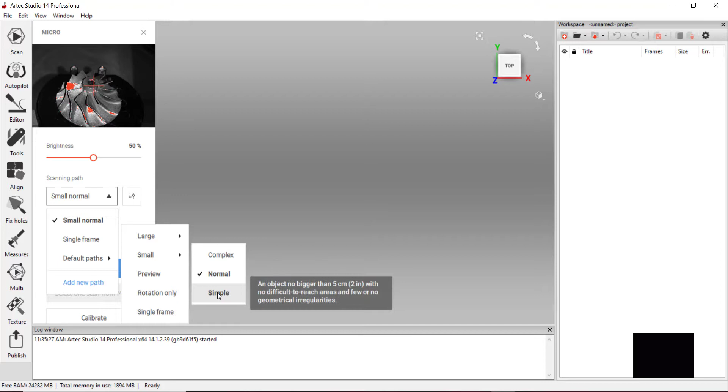Small objects like this, again, complex, normal, or simple. The complex path selection will actually provide us more scanning area, so it does take a little longer. And then we also have our normal, which is basic, and then simple. So if you're just doing something that maybe has less undercuts in this part, you might go simple.

Let's go ahead and set this up on normal. And then we can set this up if we wanted to do something with high resolution, also if we wanted to capture some color. So let's go ahead and do some high resolution scans on this.

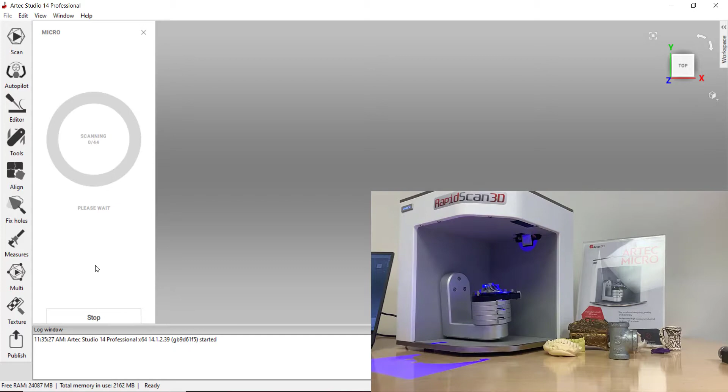So what the scanner does is it actually projects a pattern onto the surface, and based off of the distortion of the pattern, the cameras will use that to take pictures and align each scan to each other. The scanner has a 2-axis turntable, so the whole scanning process is really automated, which is really nice.

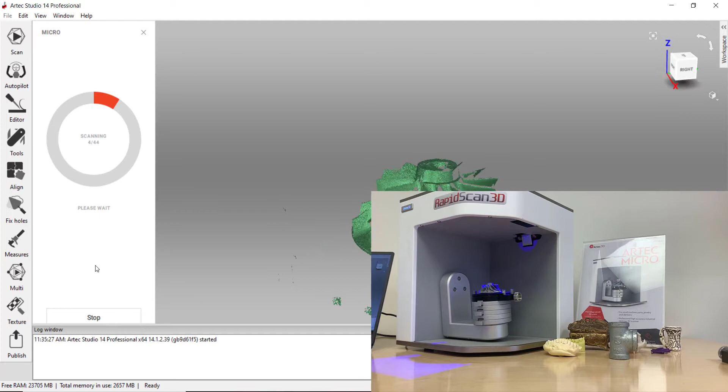So with the normal setting, the scanner will capture 44 frames here, and it'll give us a progress bar while we're going through everything.

The stated accuracy of the scanner is going to be plus or minus 10 micron, and stated resolution is going to be 30 micron. So accuracy 10 micron, 0.01 millimeter, and resolution 0.03 millimeter.

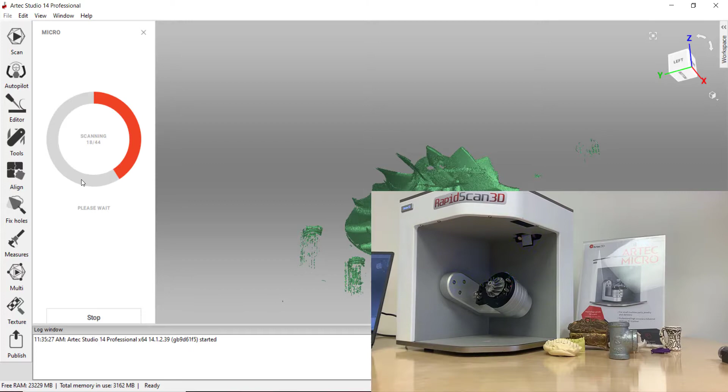We get asked a lot, well, what's the difference between accuracy and resolution? Accuracy is repeatability. When we state the 10 micron accuracy, this is a repeatability for us. Typically we go through a process where one person scans the part a certain amount of times, and then we pass that along to a few other people.

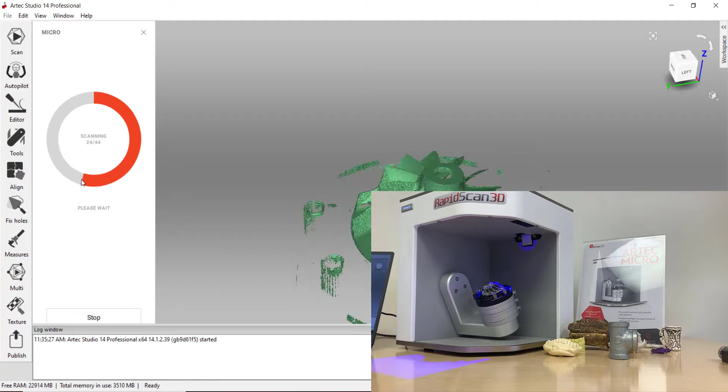It could be 3, 5 other scan technicians, and then we take the data from each of those scans from each of the scan technicians, and then we do an inspection, or an average of accuracy between those scans, and that will provide us what the stated accuracy typically is from the manufacturer.

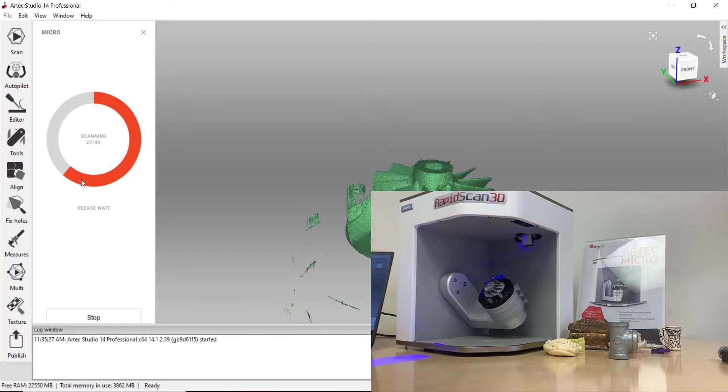The resolution is actually the point spacing. So when we're scanning this, the resolution at 30 micron or 0.03 millimeters means that within 0.03 millimeters, we're going to have a point, point to point. So there could be a little bit more, but typically that averages out at 0.03 millimeter resolution.

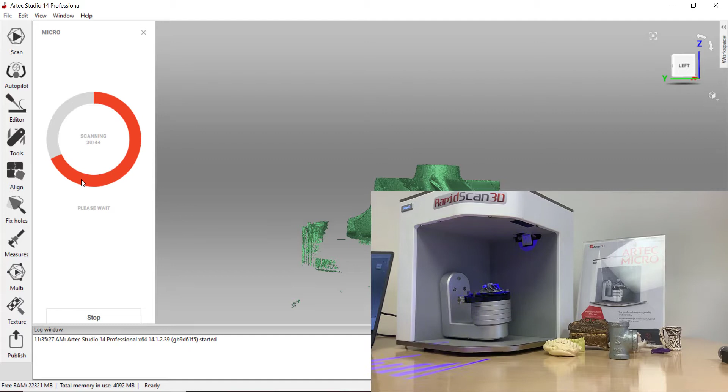Each one of those points has an X, Y, Z coordinate system, so it knows where it is in space. And that's how we have the ability to create the mesh and connect those points by triangles, because of the point spacing and the X, Y, Z coordinate systems.

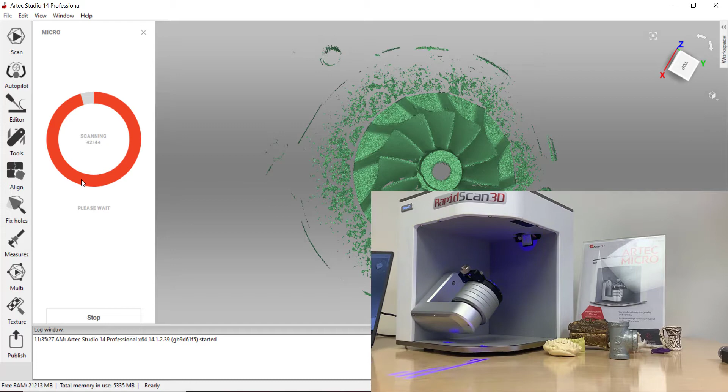All right, so for our first scan that we have here, we took 44 pictures or frames, and this is just the point cloud from the data.

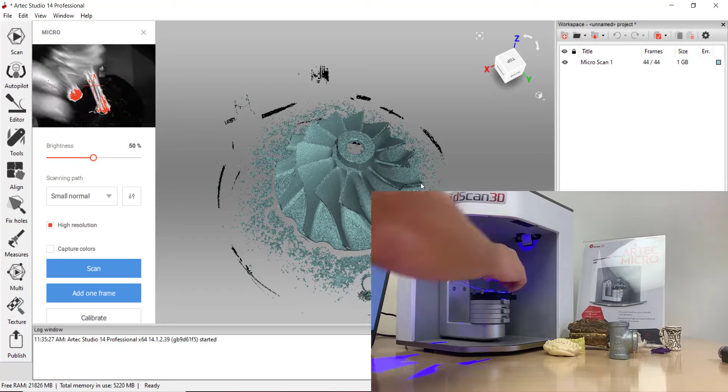Of course, we haven't scanned the bottom, so let's go ahead and pull this off. To attach this, I just used some putty, or museum putty, and attached it to the bottom. You'll notice here that there's some female screw fixtures. The system comes with some fixtures we can use to mount the part if it's a little bit heavier. This valve might be a little heavy for the putty to hold, but for this part, it's pretty light, so we can just use this putty.

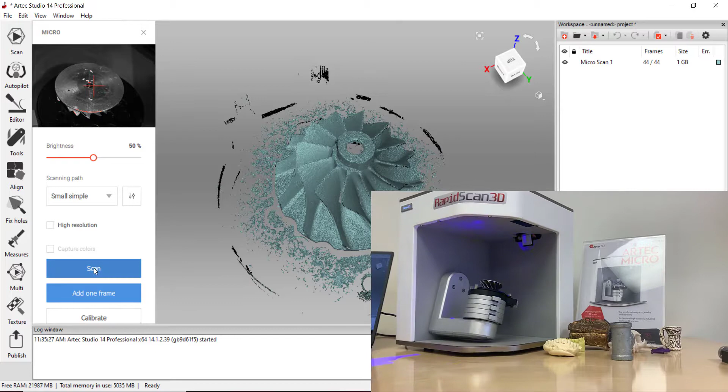I'm gonna go here, and let's go ahead and scan this again. This time, I'm just gonna do a small, simple scan. We're just trying to capture that bottom area. We don't need the high resolution because we're trying to capture this, and we'll go ahead and scan on it. What you'll notice here, last time when we scanned, it gave us 44 frames. So here we're actually only going to do 28 frames.

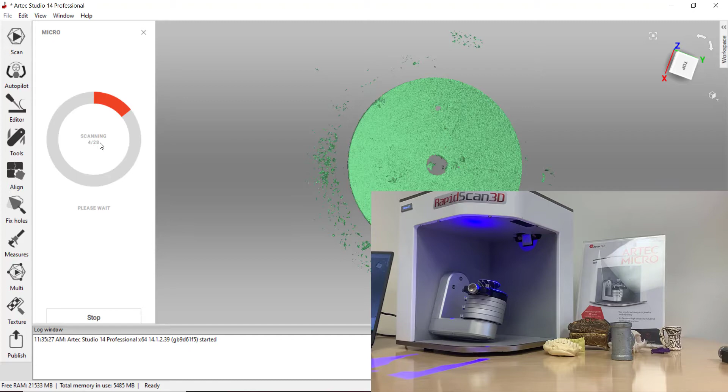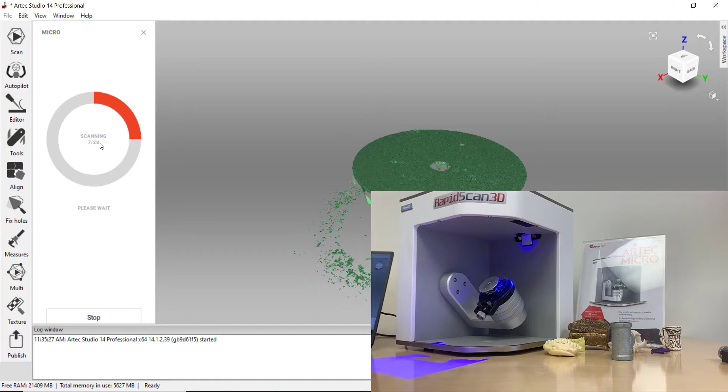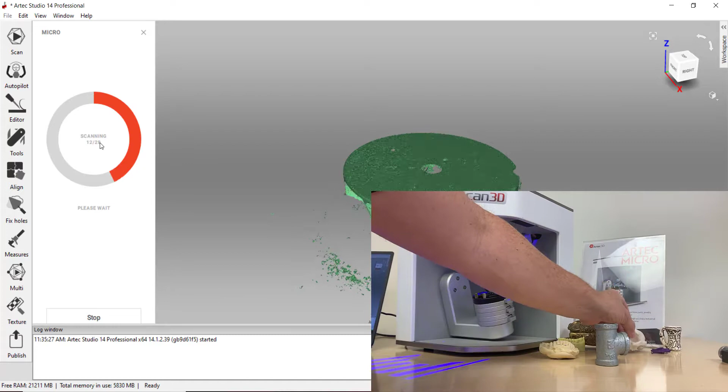What you'll also notice is that this scanner is a desktop system, really easy to move if you need to - you just need to put it right next to your computer. It's great for scanning, it's designed for scanning smaller parts. So you see here we have this valve. We do a lot of stuff with dental implants, small 3D printed parts - I think this is like a rat skull - things like that. That's kind of the ideal space or part size for scanning these objects.

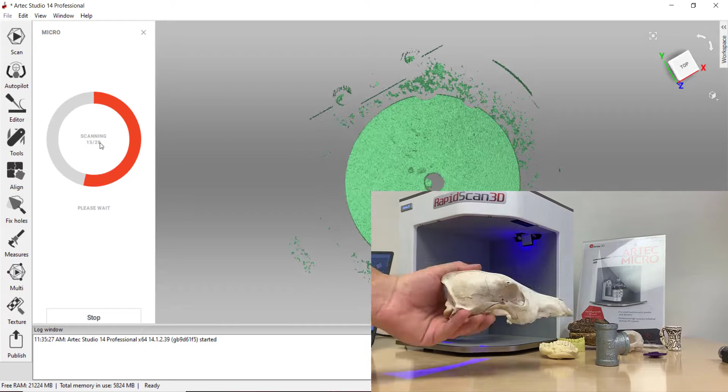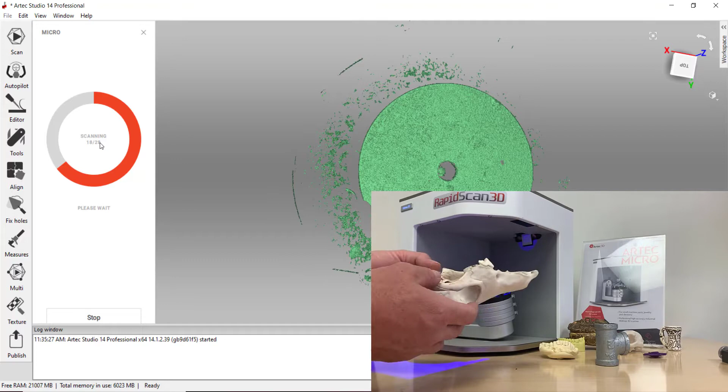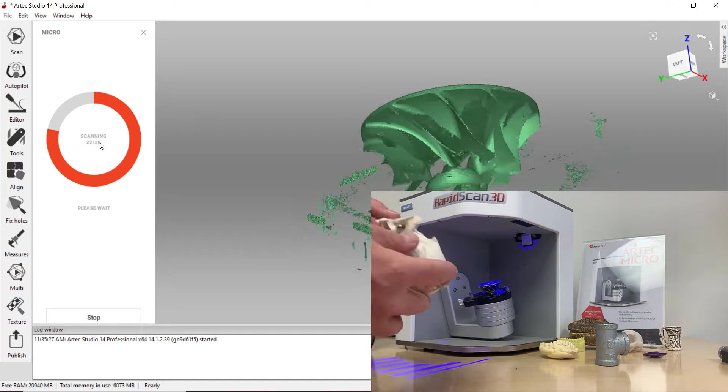Now, if you're trying to scan something larger - we have a lot of clients looking to scan skulls or bones for archaeology, anthropology type stuff - this might not be the ideal size for the object. We still can do it. If you wanted to get some small, high detail within an area, we can set this in and scan it. Remember, we can also create paths so we can scan from one side just to get some high detail, and then maybe take some Space Spider data, scan the part, and combine those. So maybe we'll do another webinar on how to combine the data from the Artec Micro and the Space Spider for parts like this.

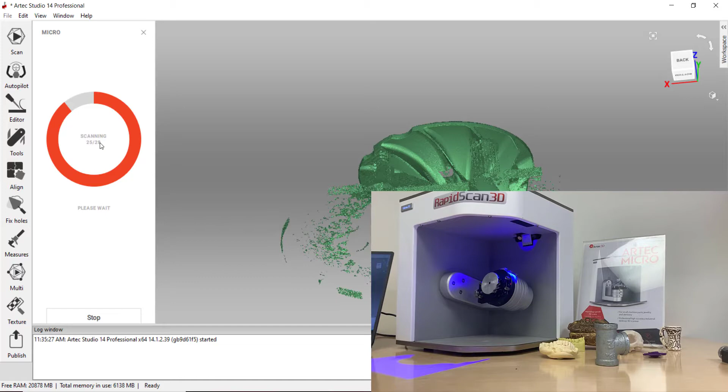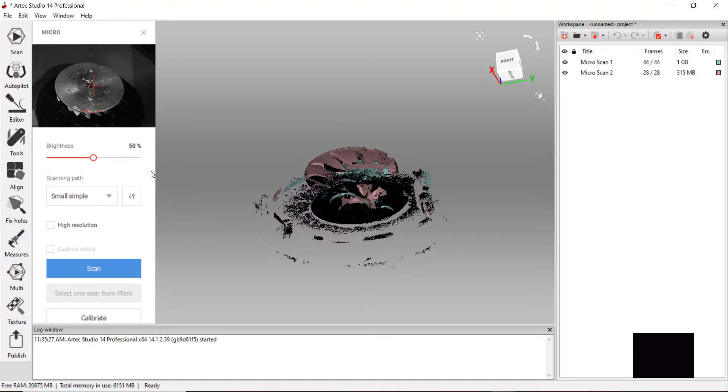All right, so we're just coming up and looks like we're all finished. So now we have 2 scans here. You'll notice that they both have different frame amounts, and they're not aligned. So we have our scan 1 here, which is our blue one, and we can identify that as here. And if we switch them around, we have this more pink color for the bottom. So let's go ahead and click out of here.

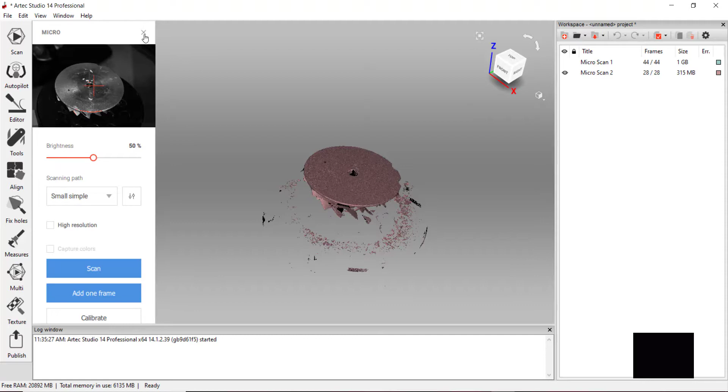The first thing we're going to do here is delete some of this table area that we don't need, so let's just clear some of that out. I'm going to go into my editing tool, the eraser tool. With the eraser tool, we have a lot of functionality here. We have a 2D eraser that we can kind of erase through - this is a nice tool.

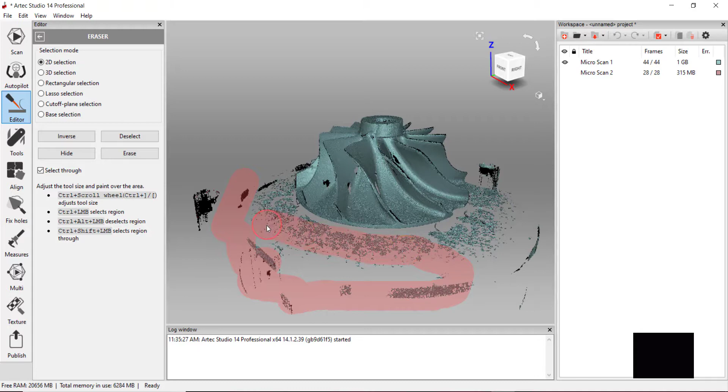We also have one of my favorite ones, which is the lasso - oh sorry, that's the rectangle one. So with the rectangle, we can just delete out of here. We also have a lasso tool, we can just lasso around areas and delete.

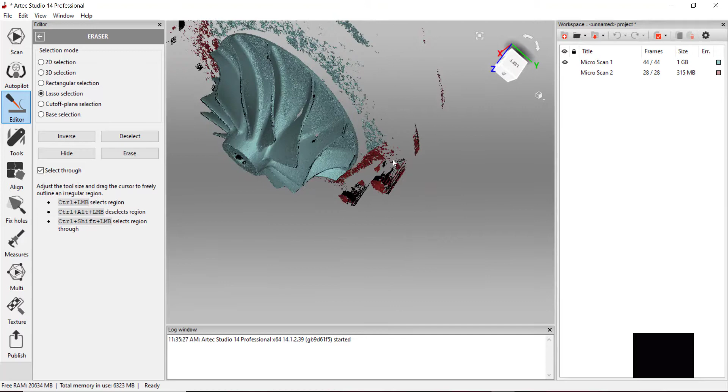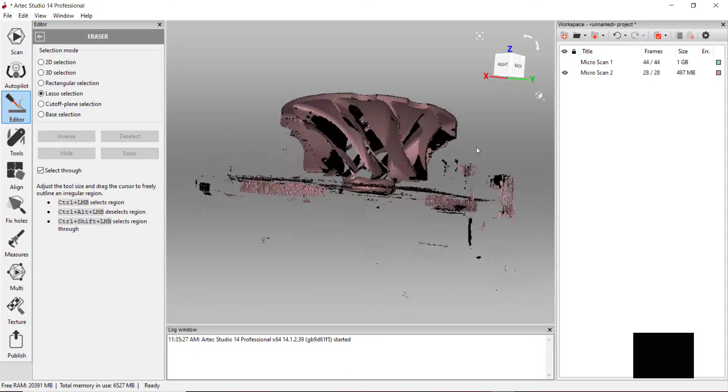And let's go ahead and delete all this out of here, erase it. And let's just double check on that other one, see how much we have. All right, same as here, we'll just go ahead and do this - for this part, I'm just going to use that rectangle and delete it. It's okay that we're deleting some of this data. We have it on the bottom side, so most of this we're just using as reference for when we can align these scans.

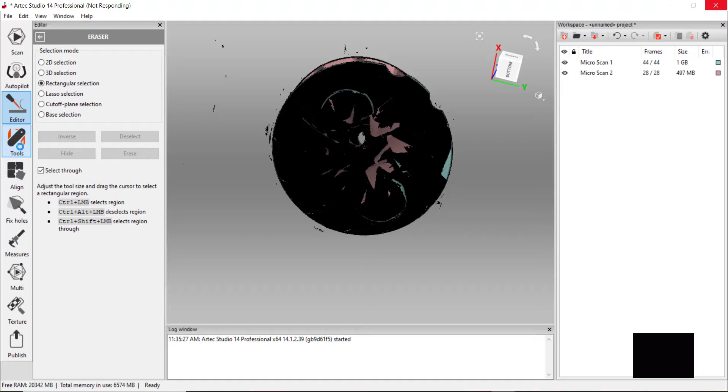Once we're done with deleting out of this, what I want to do is actually do a registration. What the registration does is it's going to do a best fit for each of the scans. And of course, in a webinar, things happen, so this is a little delayed, but no problem.

Let me go ahead and show both scans here. The software actually does a fine registration on each individual scan from the Micro, so it's grayed out. We don't have to do that. So the next thing we'll do is we'll just go ahead and align these scans.

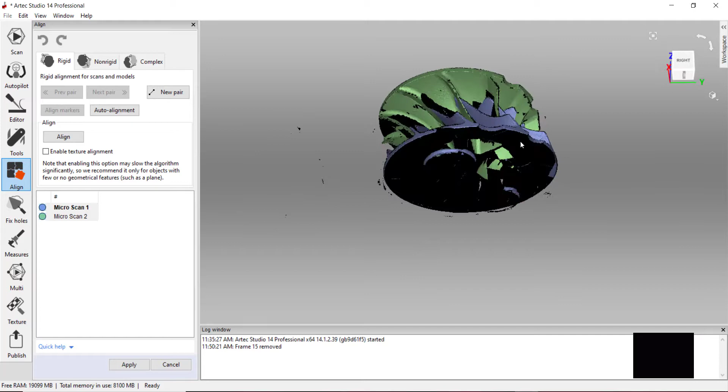We do have an auto align tool, which is really nice. It just automatically aligns the scans for us. I'm just going to go ahead and show you another tool. It's called pinpoint alignment.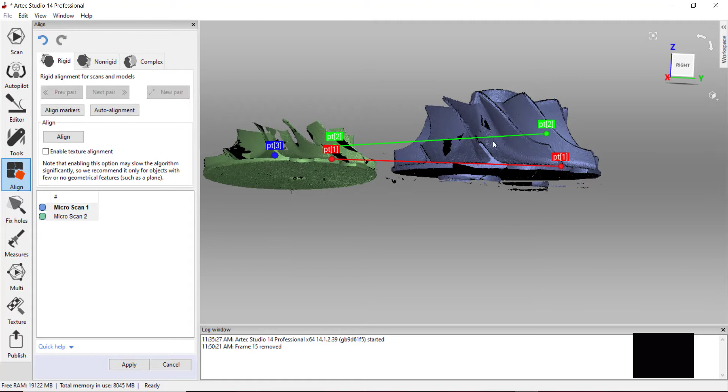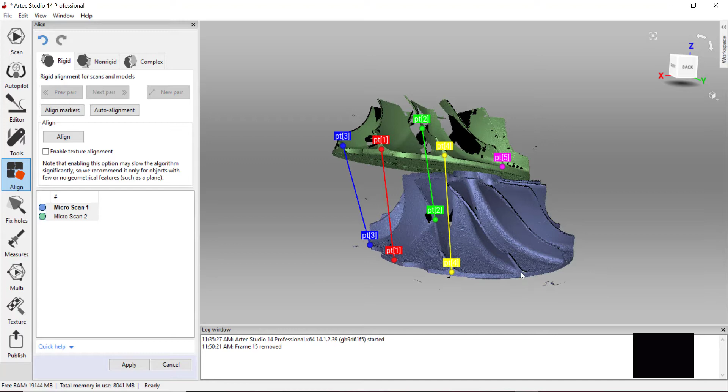What we're doing here is just taking a couple common points on each part of the scan, helping the software do a quick alignment. I know there's a spot right here for each of them, and maybe one more. Typically you need about 2 or 3. We maybe don't need as many as here. I'm just going to align that in.

So it got to where these points were close to where I put them, but as you can see, the data is not aligned, and that's no problem. This is just for getting it into a general area, and then we're going to click Align, which allows the software now to use the common geometry that we have to do the alignment.

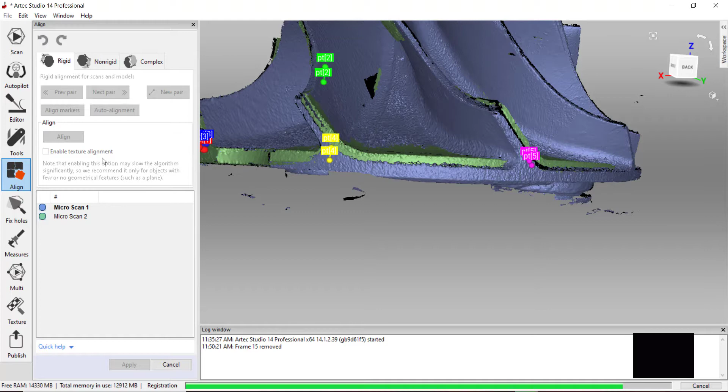We also have an ability to use texture alignment, so using color. If you are scanning something that has a lot of color, we can actually utilize that tool to do the alignment. All right, so it looks nice and aligned.

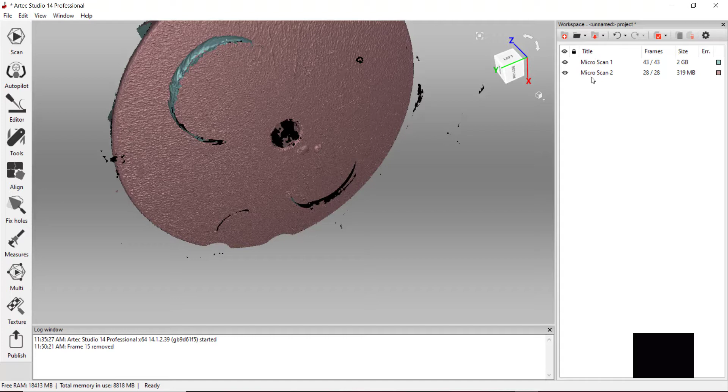I did notice that there's some data here left over that I didn't clear out. So let's just go ahead and hit apply, and I can see it's coming from the blue selection. So let me just go ahead and clear that out first.

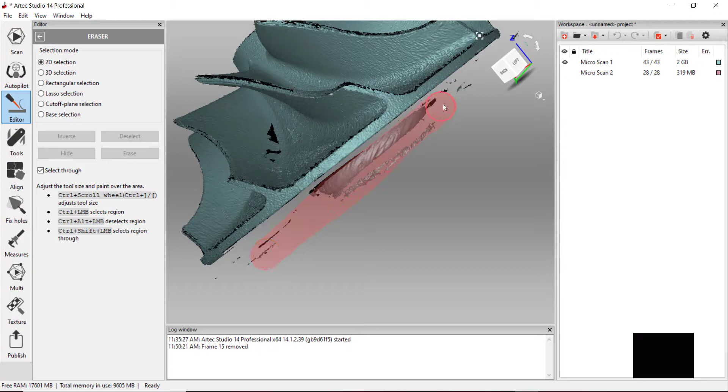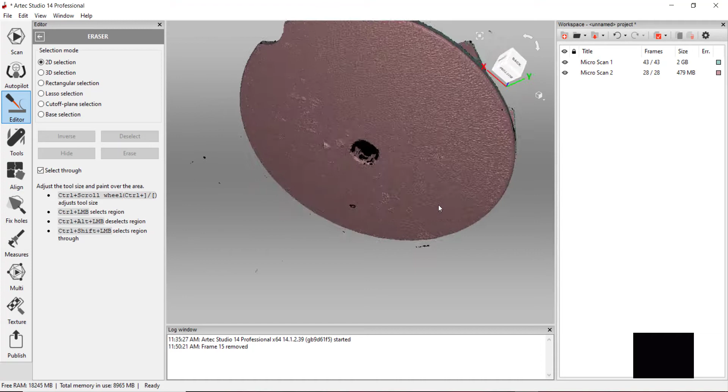A little more right in here. And erase. All right, so now we have both scans here. We did the alignment process. So I'm just going to click out of here.

Once we're done here, now that we have these both aligned, what I want to do is go ahead and do a global registration. So I'm going to go into my tools section, after I click out of there, and I'm going to do a global registration.

Just going to use the geometry because we have no texture. But if we did apply the texture when we're scanning, we'd have an option for texture here, and I'm going to hit apply. What global registration does is it looks at these individual scans and does a best fit between the two.

So automatically when we're scanning, the software will do a rough registration, which you'll see on top under the registration - that's aligning all the scans together. And then once we're done, the software automatically did the fine registration.

We can use that later in a different scanner. Artec has the Micro. They also have the EVA, Space Spider, Leo, and Ray. So we do have the ability to use that fine registration in that software as well.

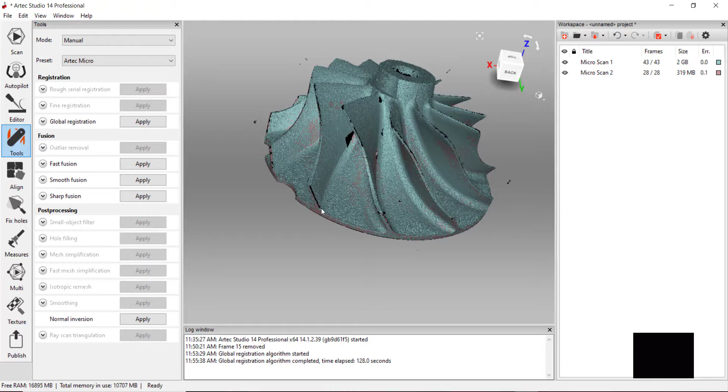All right, so we went ahead and did the global registration. Everything looks really good on this side. And now I'm just going to go ahead and do our Sharp Fusion.

So I'm going to go ahead and do a drop-down menu on the Sharp Fusion. Under Sharp Fusion, basically, we have a default resolution set at 0.7. We can actually increase the resolution if we like by lowering this number.

I'm going to stick to defaults on a lot of this stuff. Don't want to play around too much with some of the settings here for the webinar, but if you have questions, we can definitely set up a separate time to do another web demo. We can go into that process.

Artec Studio has a lot of parameters that you can work inside besides going through default settings. So those are kind of next level things.

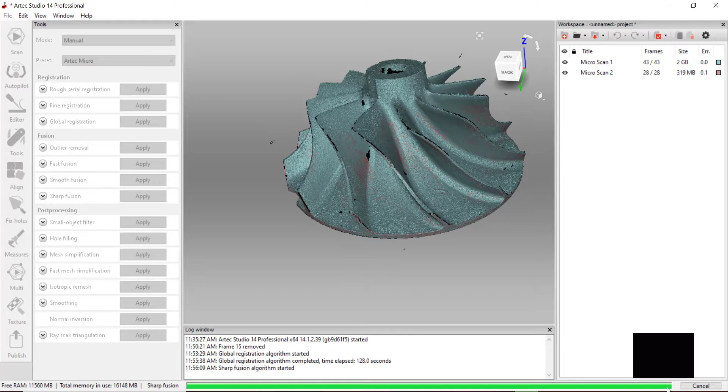All right, and here's our file. Full 360 here of the parts. We do have some outlier data here. As you can see, we have a really cool feature here called Small Objects Filter. Click of a button, and it deletes it all out.

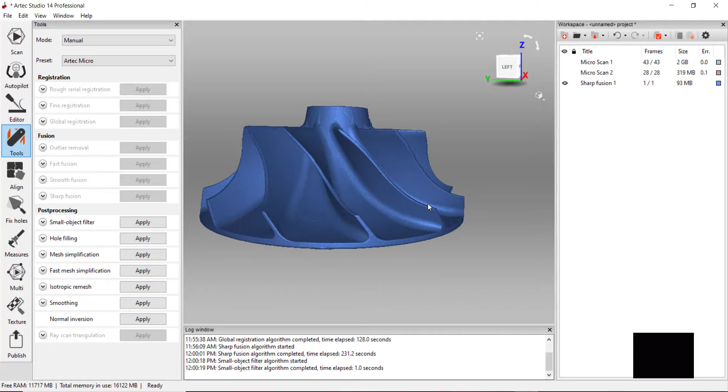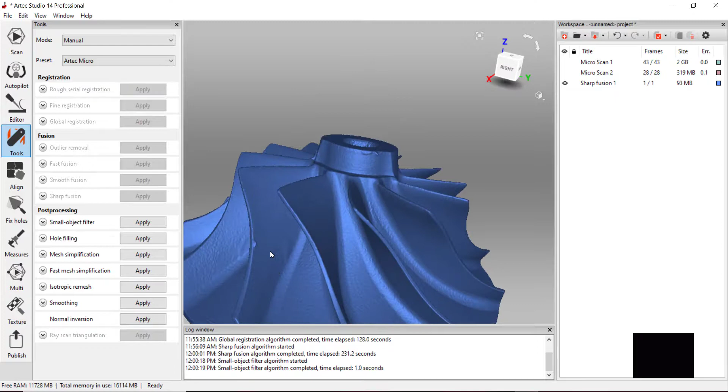So Artec Micro, excellent, as you can see, for scanning parts like this. Really high detail - as you can see, we have so much detail that I forgot to remove some of the putty here, so that's being shown inside. Also, there's a nice chip within this turbine, this little blade, so we can see the high resolution of that. I think on one side, yeah, here's some of the markings on the part - you can see from here.

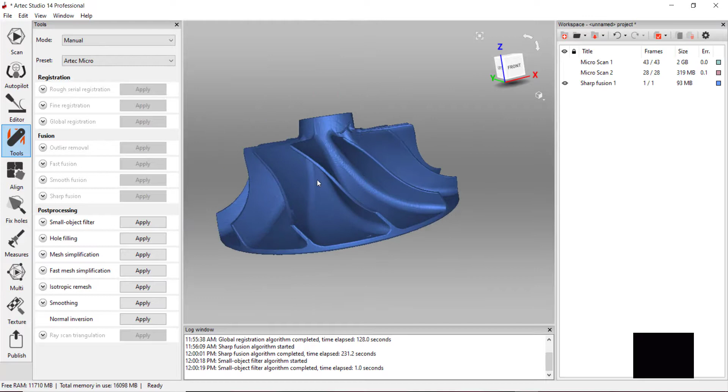So this is just a quick webinar. We wanted to show you the Artec Micro, the process. We do have a lot of clients in the automotive industry, aerospace, manufacturing that are looking to scan small objects that need high resolution, like this little turbo blade. So this is an excellent scanner for this purpose.

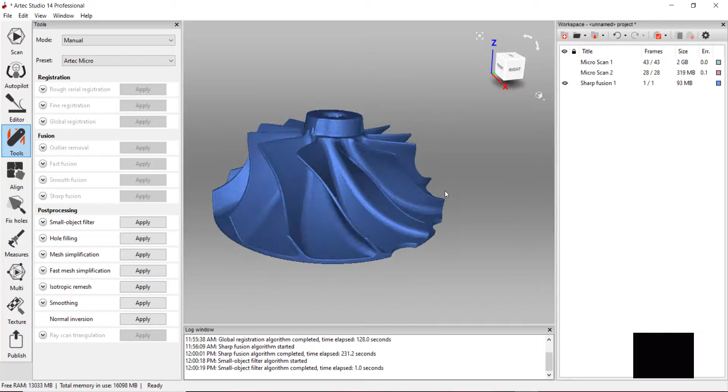I think we will set up another webinar with one of our application engineers showing the reverse engineering side of this part. So if you have an existing part, how do you reverse engineer it and create a CAD ready model for manufacturing? Hopefully we'll set that up pretty soon.